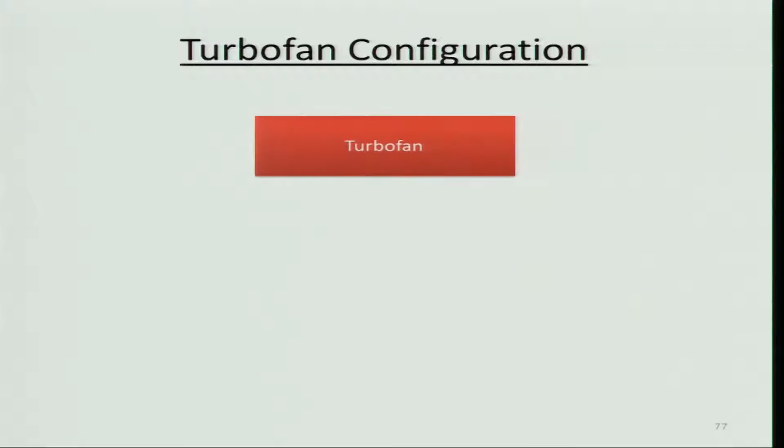So, various configurations have been developed over the years. I will show you some of them, and an important configuration is the single spool engine. Single spool means basically a single shaft connecting both the low pressure compressor and low pressure turbine.

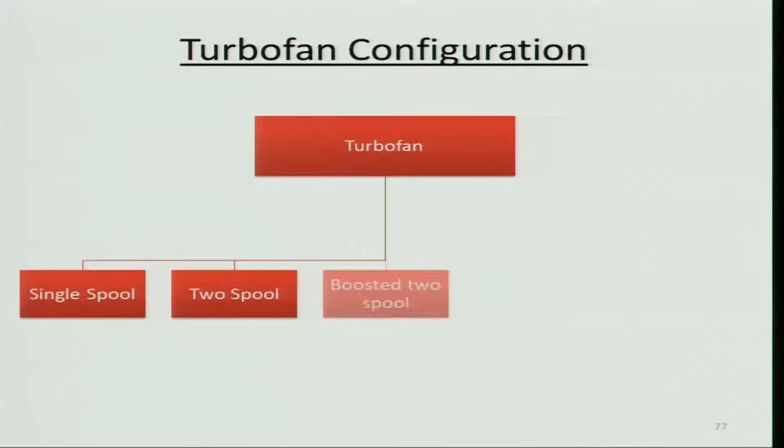There is the low pressure compressor, high pressure compressor, high pressure turbine, and low pressure turbine, and the two spool engine where you have two shafts which take care of surging, and boosted two spool engines and three spool engines. There is another variety which has come up, the geared fan, and another configuration that has come up not from the perspective of avoiding surging, but for compactness: mixed flow engines.

In separate flow or unmixed flow engines, the fan flow and core flow are separately expanded in two different nozzles, but there is a turbofan engine where you can mix them together and then expand in a single nozzle such that the noise level can be reduced. Of course you can get the thrust too, but I am not going to discuss that.

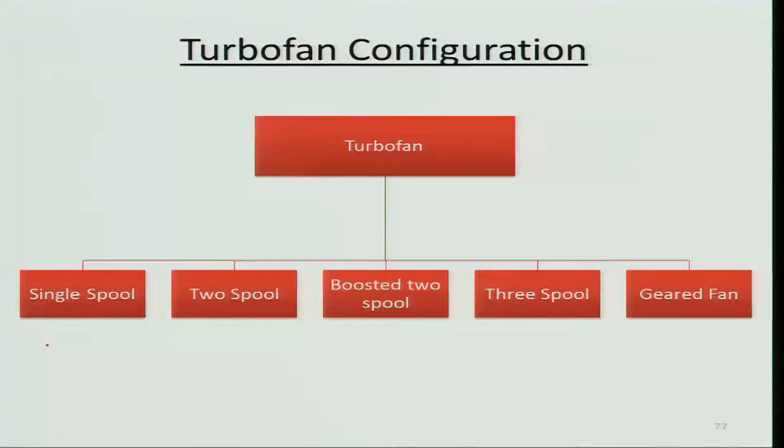What I am now concentrating on is discussing the engines. If you look at the single spool engines, it is basically a very simple one and is being used in fighter aircraft and other places, but some modern fighter aircraft also use two spool engines.

Let us discuss about two spool kind of engine. If you look at here, the high pressure turbine, this is basically a turbine, right. High pressure, HP stands for high pressure, it will be running the high pressure compressor, and the low pressure turbine will be connected to the fan.

Why? Because the fan cannot operate at a higher RPM, the tip particularly will be have a high speed and it may exceed the speed of sound. If it exceeds, then the shock will be formed, and these are not designed for that. Therefore, the losses will be very, very high.

These are all subsonic turbo machinery what is being used as of now. In future, maybe transonic or supersonic will be used. Maybe some of you will be involved in designing that, which is a very, very challenging job. So this kind of engine is being used, and particularly I have taken an example.

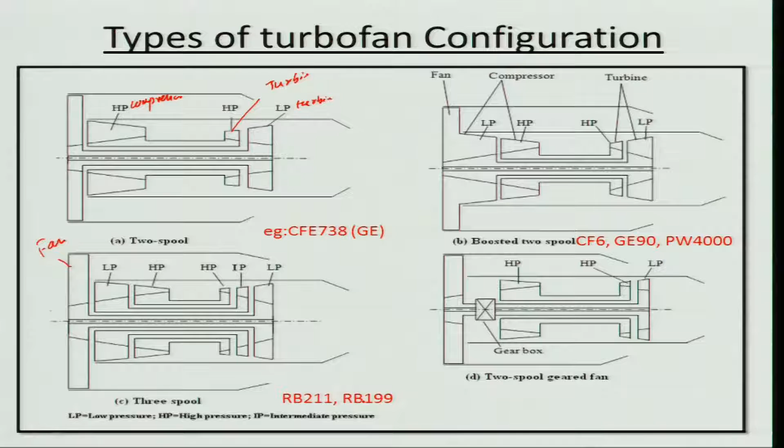There can be several engines, I have taken a few of them as examples, but there is another engine which is being promoted by Pratt and Whitney, 2 spool geared engines. Instead of using a direct connection between the low pressure turbine and the fan, they have used a gearbox, but keep in mind that the design of a gearbox is not that easy because the power level will be quite high.

We will see this kind of problem particularly in turboprop engines, but here the power from the low pressure turbine which will be transferred to the fan will be relatively low as compared to turboprop engines. So, therefore, they are designing this gearbox which is quite noisy, it makes a lot of mechanical noise. So you can control this speed and manage to have a higher efficiency fan over a whole range of operation. So, therefore, they are already using this advanced fan and advanced technology fan integrator engines, but it is not very popular as of now even today.

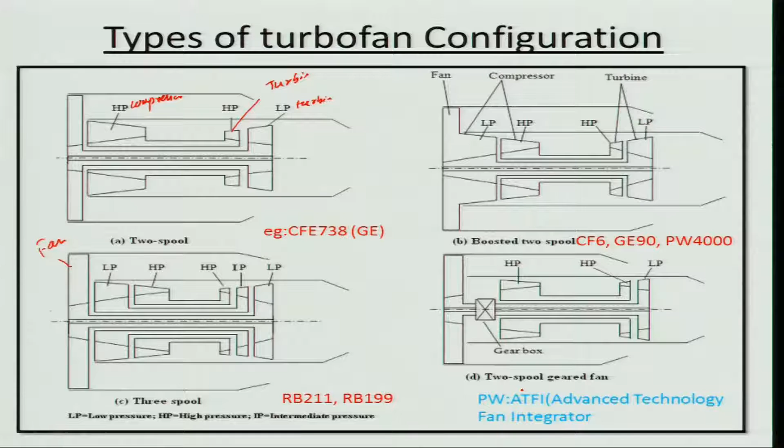Now we will take up an example of how to solve a problem like an ideal turbofan engine flying at an altitude of 10 kilometers, flight Mach number of 0.85. The pressure ratio across the compressor and fan is 10 and 2 respectively. The total compression ratio in the core stream will be 20, that is 10 into the fan pressure ratio of 2, keep that in mind. Bypass ratio of the turbofan is 5 in this example. You will have to determine the specific thrust, specific fuel consumption, propulsive efficiency, thermal efficiency, overall efficiency, and also determine the static thrust and TSFC under the static condition at sea level.

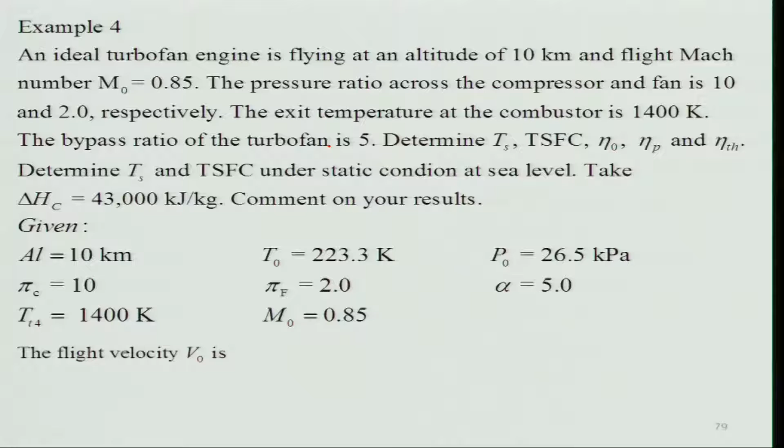So these data are given as I discussed. First we will have to find out what is the flight velocity. We can get that very easily because we know this altitude, from this altitude we will get the temperature, and then V naught is equal to root over gamma R T naught multiplied by the flight Mach number. When you substitute these values, you will get 254.6 meters per second.

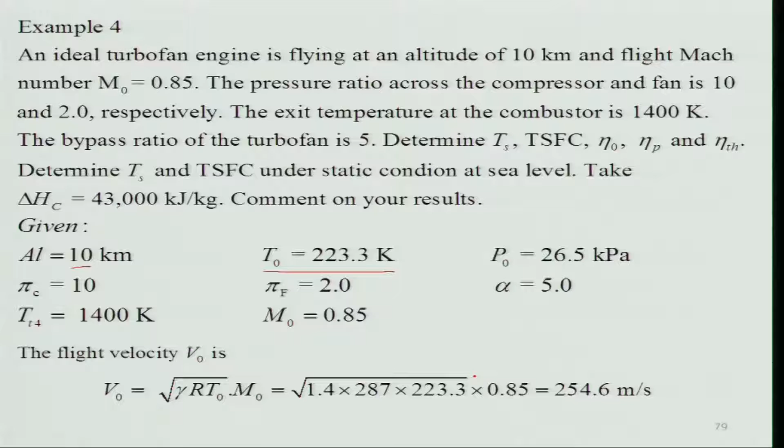As I am emphasizing, whenever you want to solve a problem, it is better to solve in a systematic way, not going straight into the formulas. But whenever you are going to do parametric studies, it is advisable to use those formulas so that you can write a program and do it very easily for repetitive jobs, you need not waste your time. But to appreciate how these things work, it is important to solve this problem step by step.

So what is happening, I have already talked about this in the TS diagram. This is basically compression: 0 to T2 is your fan, and T2 to T3 is your compressor, and T3 to T4 is basically combustion. This is the combustion, and expansion is 4 to 9. In this case, this is the turbine, low pressure turbine, high pressure turbine, and then the nozzle. This is the nozzle portion.

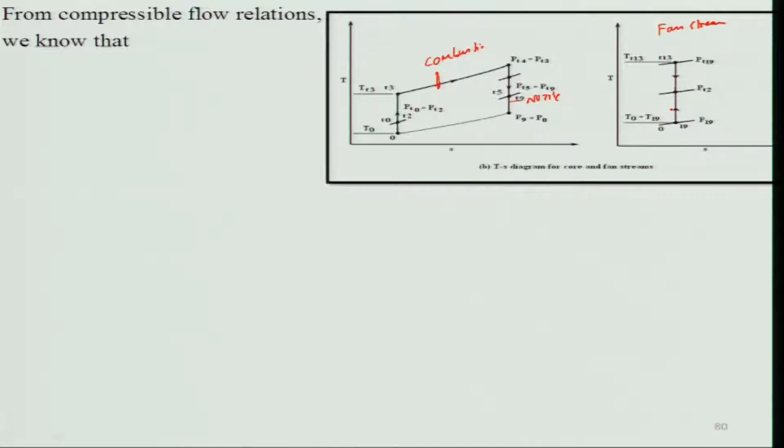And similarly, in the fan stream, this is your fan stream, going from P naught to PT2, and then PT2 to PT13. And of course it is again expanded because it is ideal, so it will come back to P19, which is the same as P naught. So from compressible flow relation or isentropic flow relation, we can get Tt naught divided by T naught.

This is equal to 1 plus gamma minus 1 divided by 2 times M naught square. We substitute these values and get the total temperature Tt naught as 255.6. Keep in mind this is not very different from T naught because the Mach number is quite small, and we know that Tt naught is equal to Tt1 is equal to Tt2, because it is an adiabatic process.

Again, from isentropic relations you can get the pressure ratio, because what we are doing is going point by point and getting these values. Sometimes you may avoid doing this in a systematic manner. I know that whenever you are in an exam, you will take a little shortcut route, but you may commit an error in the process. One has to be careful.

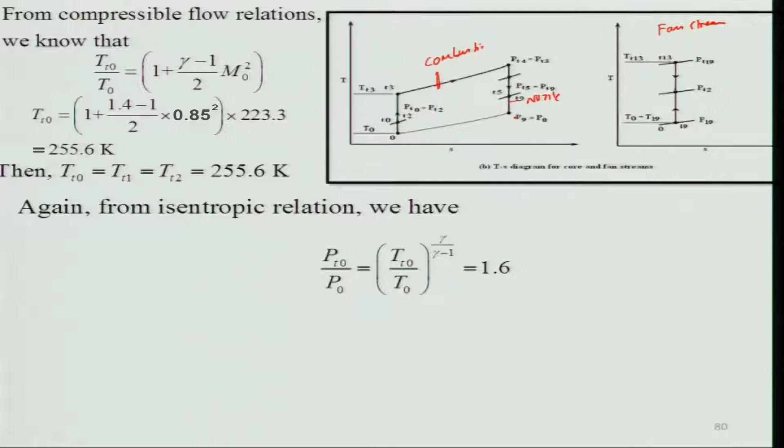The PT naught is equal to 42.5 kilopascals. So for the fan stream, we get TT2 is equal to 255.6 Kelvin, and PT2 is equal to the same as PT naught, 42.5 kilopascals. That means we are looking at the fan stream, and by the same way we can look at the compression, how much change in temperature is occurring in the compressor.

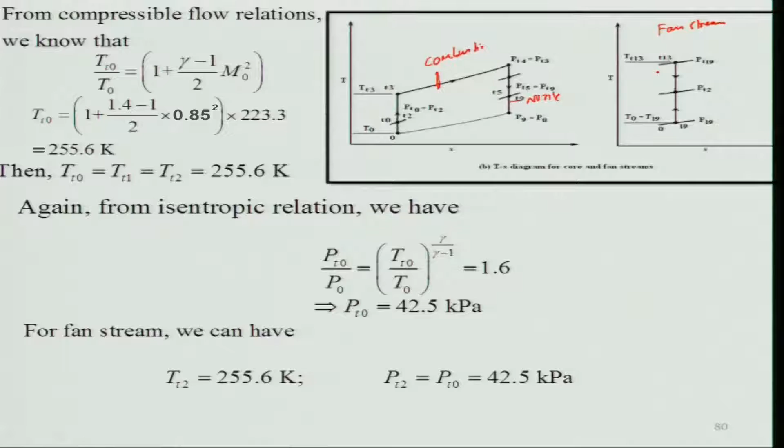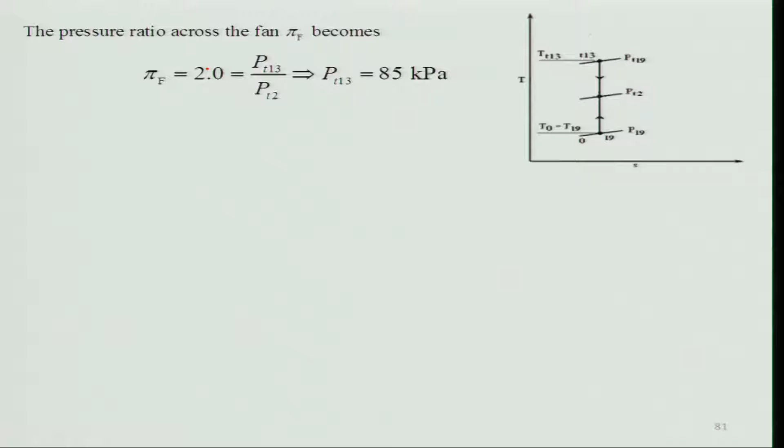So if you look at the pressure ratio across the fan, pi f becomes PT13 by PT2, which is given as 2. So you can get PT13 as 85 kilopascals, and we can estimate the temperature using the isentropic relationship, which is basically given in terms of pi f. So you just substitute these values and, knowing TT2, you can get 311.64 Kelvin.

So there is very little change in the temperature, and as we know that P13 is equal to P9 is equal to P19 is equal to P0 for an ideal cycle. For a real cycle it need not be so. So V19 square, we can get 2 Cp times Tt19 minus T19, we can take it out and express in terms of pressure ratio. So these we already know, P19 is nothing but P0, and Pt19 we know.

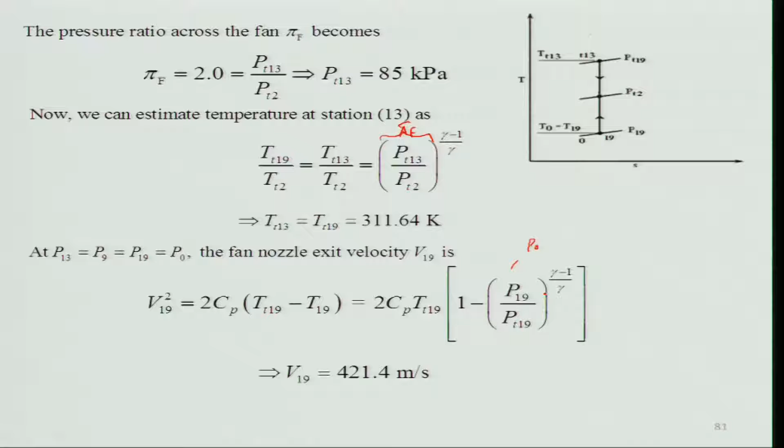So, we substitute these values, and when you do that you will get V19 is 421.4 meter per second. If you look at, there is an increase in the velocity due to the work addition to the flow by the fan. So, overall pressure ratio across both the compressor and fan, due to compression in the core engine, is pi c is 20 as I told.

So, you can get TT3 is equal to TT2 times pi c to the power gamma minus 1 divided by gamma, this for isentropic relationship, you can get this 602.1, and similarly you can get PT3, because you know the pressure ratio.

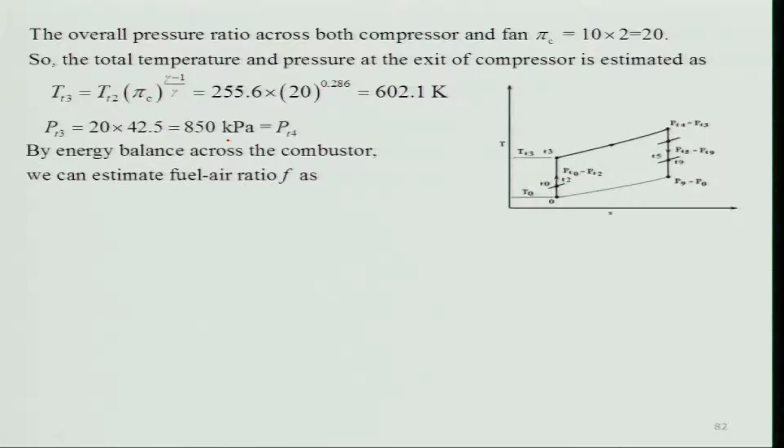So, you know the PT2, so you can get that very easily. By energy balance across the combustor, we can estimate fuel air ratio F, which we have done for the turbojet engine, similar to that, just substitute these values because it is given here 1400 Kelvin for TT4. So TT2 you know, you can get these values.

By carrying out power balance between the compressor, turbine and also the fan, we can estimate temperature. For example, we know that WC plus W fan is equal to W turbine.

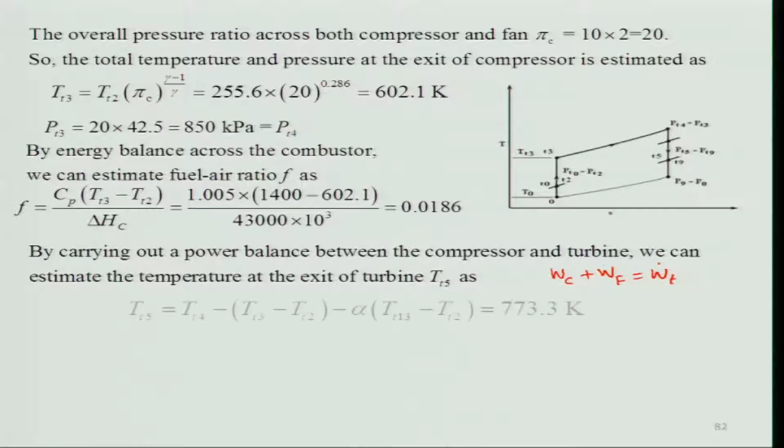If I take this and use the first law of thermodynamics for this, then I can get an expression, and we are using the same Cp, but keep in mind in a real cycle we will be using different Cp. In this case the Cp cancels out, you will get Tt5 is equal to Tt4 minus T3 minus T2 minus alpha times T13 minus T2. This alpha comes into picture because of mass being separated.

This is nothing but your bypass ratio. So, when you substitute, because alpha is known, T13 is known, Tt4 is known, T4 is known, that is your 1400. So you can get Tt5.

If you look at the turbine, it is expanded from 1400 to 773.3 Kelvin temperature. By using this isentropic relation, we can estimate total pressure at the exit of the turbine. The PT5 is equal to PT4.

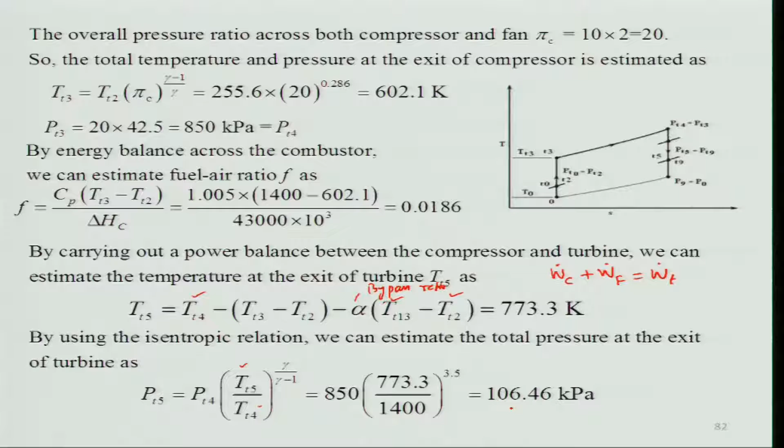We know this Tt5, we know Tt4, substitute these values, you will get the pressure at this point, 106.46 kilopascal. So, this is a very systematic way it is done, there is nothing really to understand because it is quite easy.

To estimate the nozzle exit velocity, we will have to assume Tt9 is equal to Tt5. It is not that we are assuming, it is because it is an adiabatic process, and under an ideal condition there are no losses. So, Pt9 is equal to Pt5.

So, when you substitute this value, V9 is equal to root over 2 Cp times Tt9 minus T9, and we know this pressure ratio which can be expressed as 2 Cp times 1 minus P9 over Pt5 to the power gamma minus 1 divided by gamma, and when you substitute these values you will get V9 is 714 meter per second.

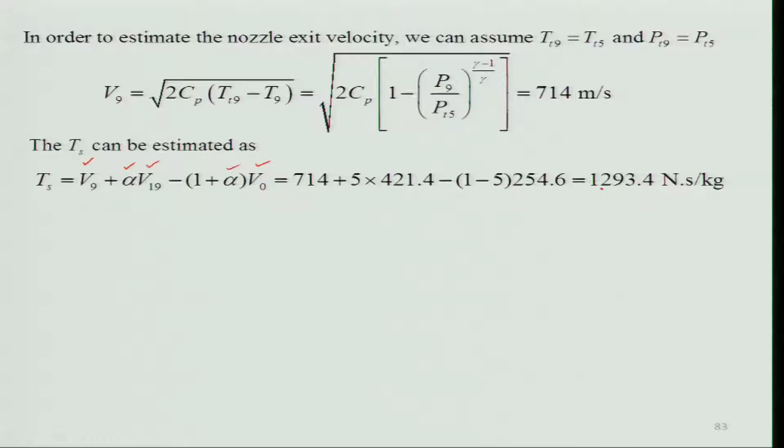And Ts we can estimate very easily, because we know V9 and alpha is known, V19 already we have found out, and this V0 is known, this is known. So, you substitute and you will get the specific thrust, which is basically 1293.4 Newton second per kg.

So, TSFC can be estimated because we have already estimated F, divided by specific thrust. So, you will get 1.44 times 10 to the power minus 4 kg per Newton second.

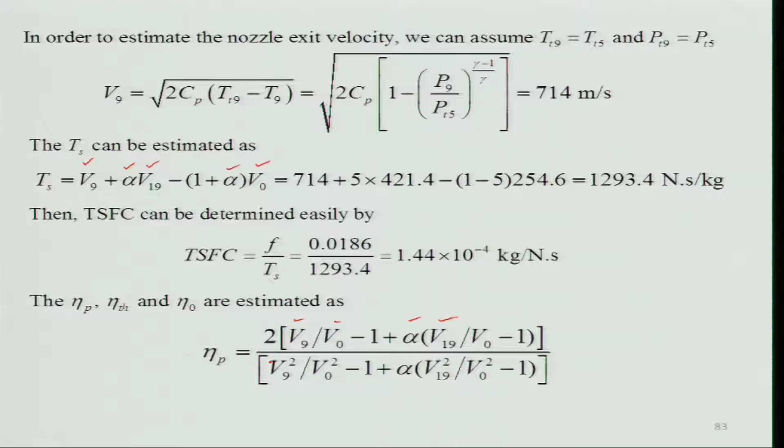So, we will estimate this propulsive efficiency, thermal efficiency and overall efficiency. If you look at this, we have already derived it, we will just use that, or you can use your own thing, that is the thrust power, total thrust into the velocity, this portion divided by the other, you can use that. So, V9 is known, V0 is known, alpha is known, V19 is known. So you can estimate this and substitute those values and get that.

What I would suggest is although I have used here the derived relationship for propulsive and thermal efficiency, you need not do that, you can go to the basic definition and then do it, so that you need not memorize it.

So, you will get that propulsive efficiency is 65.32 percent, and similarly when you substitute these values of velocities like V0, V9 and V19, and alpha is the bypass ratio and the heat of combustion, you will get thermal efficiency 63.06 percentage, and the overall efficiency when you multiply both you will get it is 41.19.

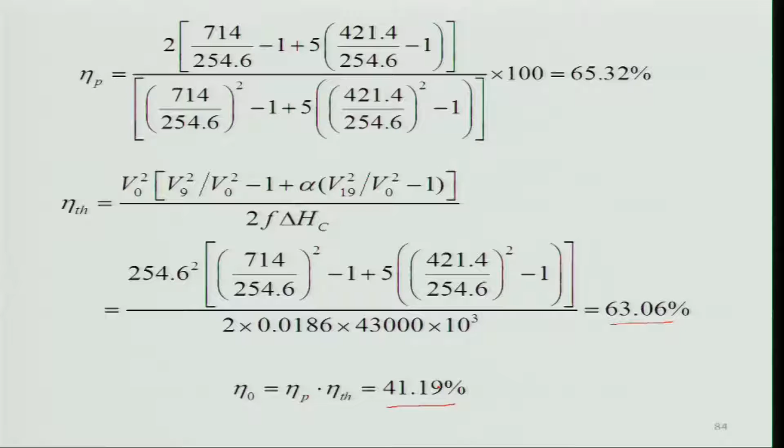If you look at the overall efficiency, comparing the same conditions, you will find that the turbofan engine has higher overall efficiency than the turbojet engine. You must appreciate that point, and I will be giving some problems in the assignment where you could get a chance to feel for it by solving yourself.

Now we will move into the turboprop engine, which is basically used whenever we want to have a higher thrust level, and of course whenever we need to have a better TSFC as well.

The typical turboprop engine schematic shows it has a propeller instead of a fan, which is unducted - there is no duct. Keep in mind the length of the blade in a propeller is much longer compared to the blade length in a turbofan engine. So there are two differences: it's an unducted fan, and also the blade length is higher.

Therefore, it has to be operated at a very low RPM. Why? Because if the length is higher, then at the tip the local velocity of the fluid will be much higher - omega into R. So since these are very high values, it has to be rotated at a lower RPM, and therefore a gearbox is used to reduce this RPM.

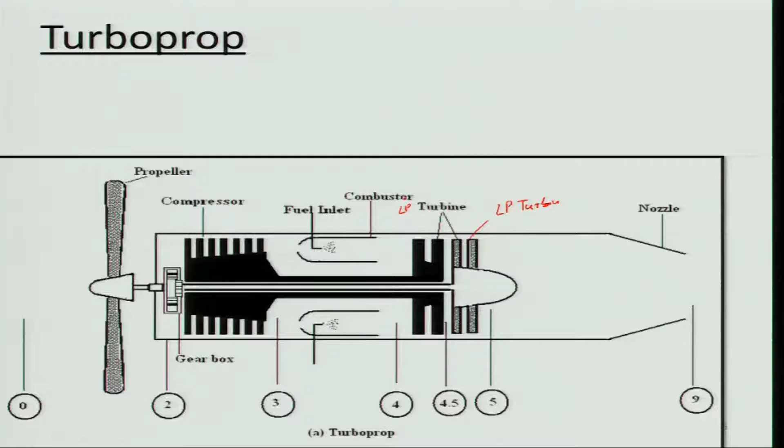If you look at the shaft, it is clearly a 2-spool kind of engine, where the low pressure turbine is connected through a gearbox to the propeller. The high pressure turbine is connected to the compressor, and this is the combustion chamber. The station numbers we are using are similar to before.

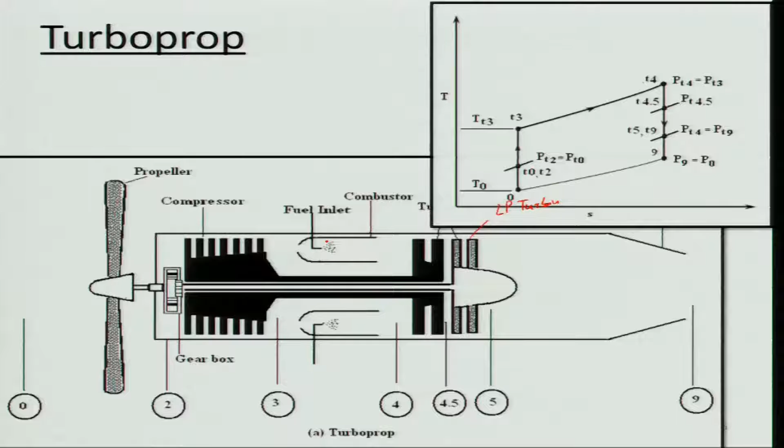Now let us look at the process. 0 to 2 is your compression due to the propeller. Keep in mind this is your core engine - air is also flowing through the core engine - and this is the propeller where air comes over and goes out.

There is compression in the compressor, and there is constant pressure heat addition - combustion - followed by expansion in the high pressure turbine from 4 to 4.5, then expansion in the low pressure turbine from 4.5 to 5, followed by the nozzle. The low pressure turbine and high pressure turbine - LPT and HPT - I am referring to.

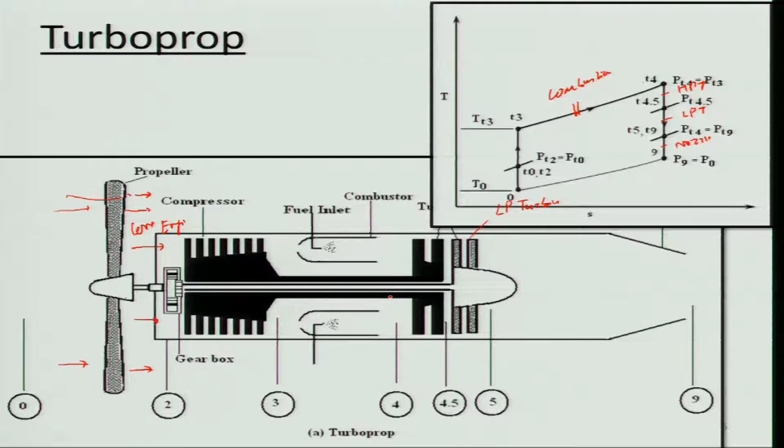So we need to carry out this analysis. Keep in mind we do not know how much air is passing through the propeller, because it is unducted. So how do we handle this? That is one very important concept. Another point is that the power given to the propeller is not fully converted into kinetic energy, because there will always be slip. Therefore, we use an efficiency known as propeller efficiency in this analysis, and we assume the gearbox efficiency is 1, which is not actually the case - that's the ideal assumption.

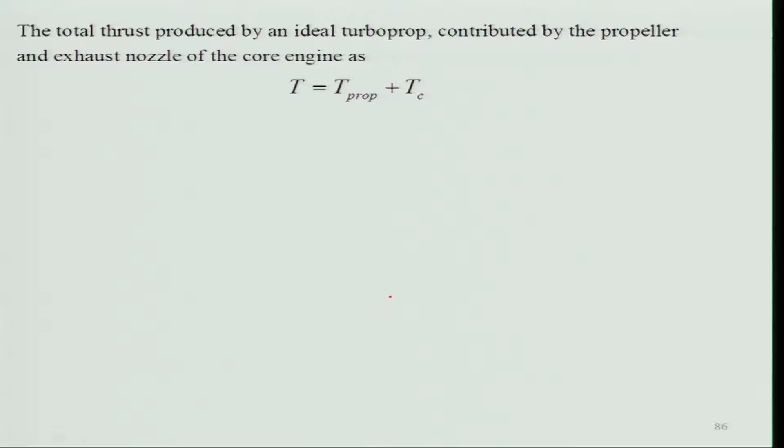So the total thrust produced by an ideal turboprop engine is contributed by two things: one is the core engine, and another is the propeller. If you look at which gives the major portion in a turboprop engine - does the propeller give more, or does the core engine give more? Generally, the propeller gives more thrust compared to the core engine, because the expansion in the nozzle is very small, although this is not clearly reflected in a TS diagram. Please keep that in mind.

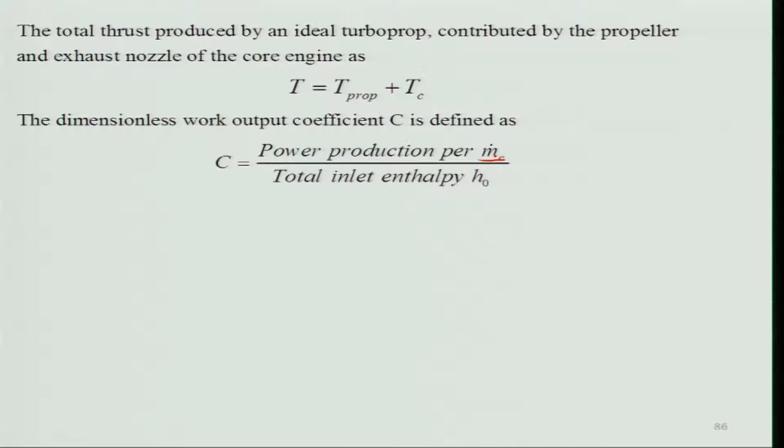We use this work output coefficient, and now we will be operating both thrust and the work output coefficient, trying to connect both. In all other analysis we use thrust and are not bothered about the work output, because we are interested in thrust and there is no problem handling that. So there is a little difference in analysis here, please keep that in mind.

Similarly, the work coefficient for the propeller will be eta propeller, the propeller efficiency, times the work input to the propeller, divided by m dot C Cp T naught. Keep in mind that we are not using total mass, we are using m dot C all the time, which has implications when we interpret the data, so I am emphasizing this point.

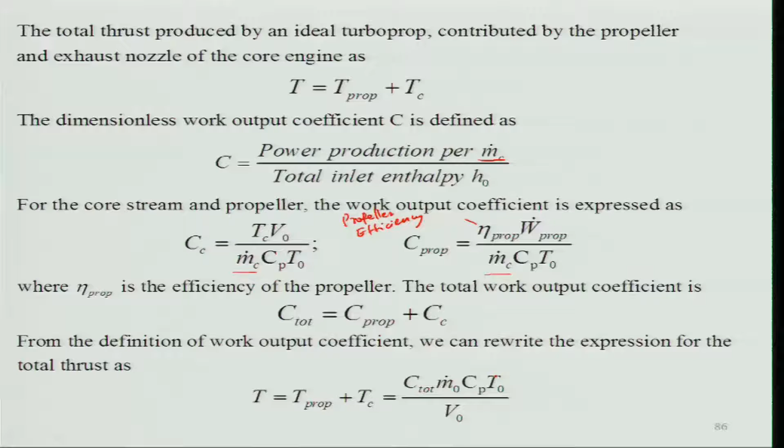The expression for the thrust developed by the core engine per flow rate can be expressed using the same analysis as for the turbojet engine. So Tc by m dot C equals A naught V9 by A naught minus M naught, and in place of that you can substitute the bigger expression already derived for turbojet engines, keeping in mind parameters like tau lambda, tau c, tau r and tau t, which are temperature ratios across components like turbine, compressor, air intake, and lambda, which is a slightly different thing defined earlier.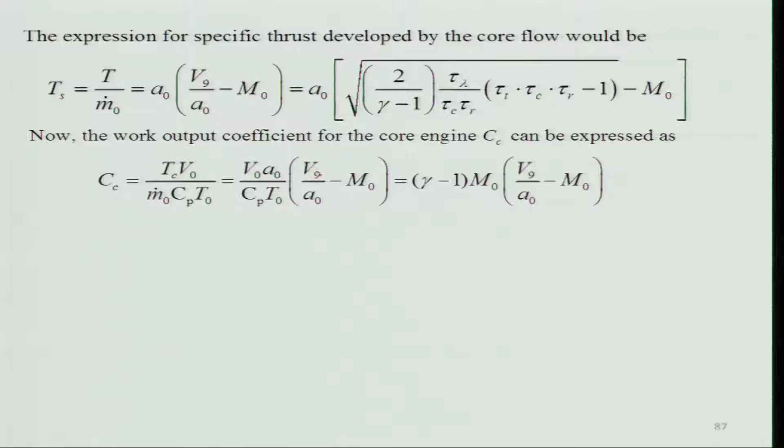The work output coefficient for the core engine is Tc by V naught divided by m naught Cp T naught, which we can express in terms of V9 and A naught by substituting these values. If you do the analysis, you will find it reduces to gamma minus 1 times m naught in the bracket V9 by A naught minus m naught. Here we are expressing Cp in terms of gamma.

The specific power, an important parameter for the turboprop engine, can be derived as Sp, the specific power, equals W dot total divided by m naught h naught, which is nothing but C total Cp T naught, where C total equals C propeller plus Cc. If you go to the definition of C total, you will get that this is nothing but C total Cp T naught.

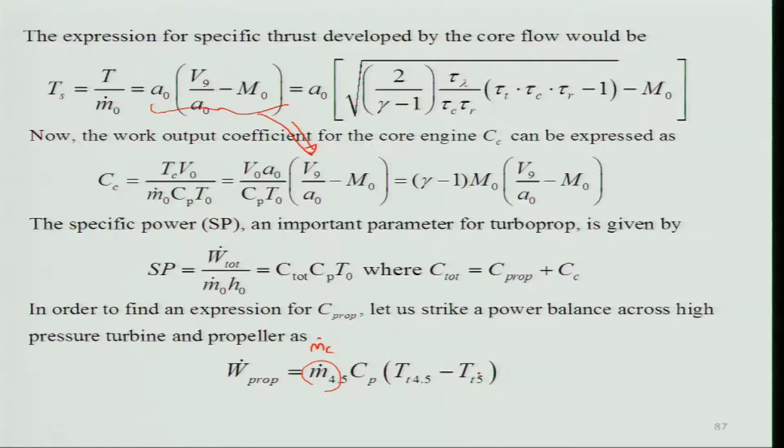In order to find an expression for C propeller, let us strike a power balance across the high pressure turbine and propeller. The propeller work input equals m dot 4.5, which is your m dot C, the air going through the core, times Cp and Tt 4.5 minus Tt 5.

So, by definition we know that C propeller will be basically W dot propeller into m dot Cp into T naught, and W dot propeller we have already seen that it is nothing but in terms of propeller efficiency and temperature, and if you just rewrite you will get T lambda tau T H. This is basically tau T for the high pressure turbine and tau T L is for the low pressure turbine. Similar to other engines, the expression for fuel air ratio you can get similar expressions which we have already derived for the turbofan and turbojet engines. So, TSFC you can get in the similar way, m dot F divided by T is equal to F divided by T by m dot C.

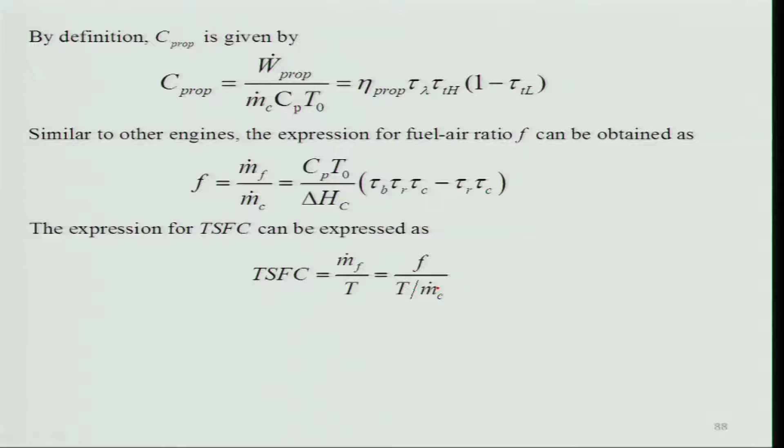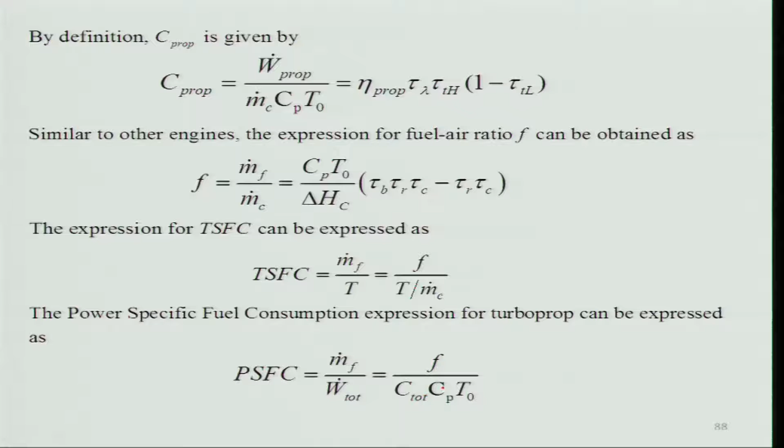Keep in mind what we are doing, we are basically looking at the mass flow rate through the core engine. The power specific fuel consumption expression, because it is a turboprop engine, therefore we are interested in the PSFC or power specific fuel consumption. So that is m dot F divided by W dot total. You know this F and C total, Cp and T naught. So if you substitute these values, you will get that.

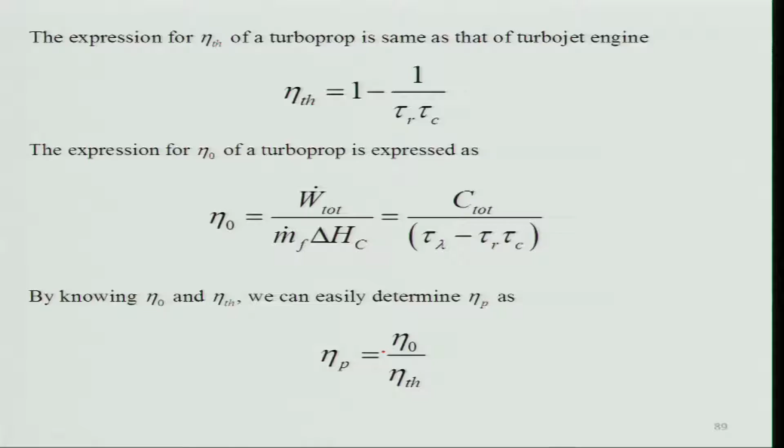And the expression for thermal efficiency will be similar to that of the turbojet engine, and for overall efficiency it is more important that you first really find out the overall efficiency in case of turboprop engine. But in case of turbojet and turbofan engine, you find out first the propulsive efficiency before you really find out overall efficiency. But it is the other way around here, because we need to find out this first and then you will get it, because we do not know really how much it is going. So this is the expression, similar way, same coefficient, but this is by definition m W dot total divided by m dot F delta H C. How much work being put into the engine, how much work being produced by the engine, and then how much fuel being burned. So by knowing this overall efficiency and thermal efficiency, we can get the propulsive efficiency. Keep in mind, this is not propeller efficiency, this is propulsive efficiency which is due to the motion of the vehicle or the engine. So that you should keep in mind.

So now what we will do, we will carry out a parametric analysis as we had done earlier, and then we will see what we are getting. Here what we are doing, we are basically taking 3 tau t values: tau t equal to 0.6, 0.7 and 0.8, and we are varying the pi c from 0 to 40, and then we are plotting specific thrust versus pi c for a certain altitude and certain flight Mach number.

You will find that when tau is 0.6, what is the meaning of that, and when tau increases to 0.8, what is the meaning of that? Tau, that means temperature ratio across the turbine, tau T, isn't it? This is tau T, that is your temperature ratio across the turbine. Lower means it is what? Less work, it is more work extraction, because the temperature at the exit of the turbine divided by the inlet.

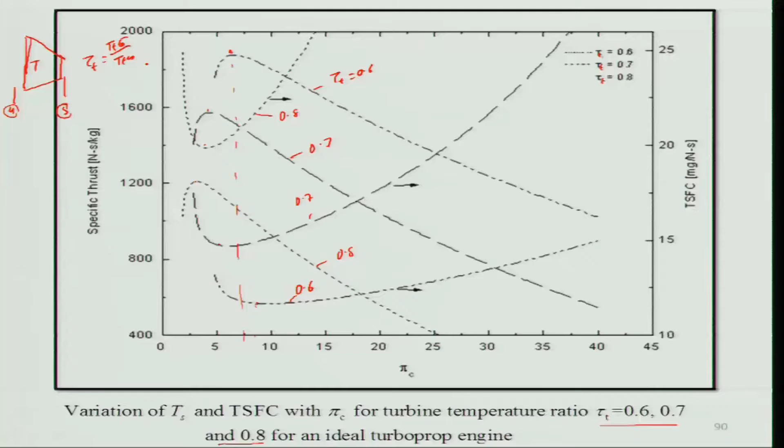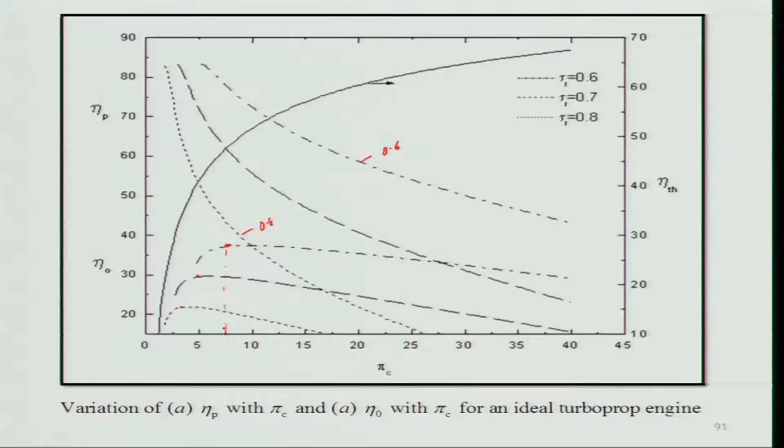at a higher pressure ratio across the compressor. That means my compressor will be more bulky, because the number of stages will be higher. So then you need to look at these aspects while designing a turboprop engine.

Of course, several other analyses one can carry out, but I will not consider those things. Let us look at an example.

A turboprop engine is flying at an altitude of 7 kilometers, that is T naught 242 Kelvin and P naught 41, and flight Mach number of 0.5, in the gas generator 50 kg of air is compressed with the pressure ratio of 12.

The exit temperature at the combustor is 1400 Kelvin, temperature ratio across the turbine is 0.5 we are using, and determine the thrust developed by core engine and propeller and TSFC if the propeller efficiency is 0.9.

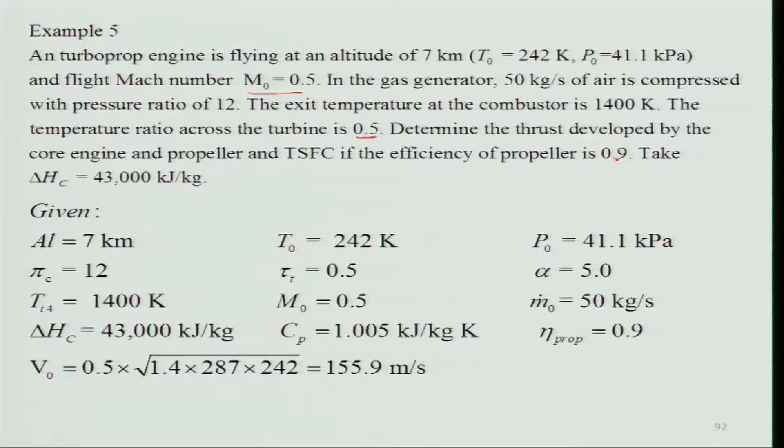And as usual we can find out the flight velocity, because Mach number is given, and we know this temperature T naught, and we know the specific gas constant, we substitute...

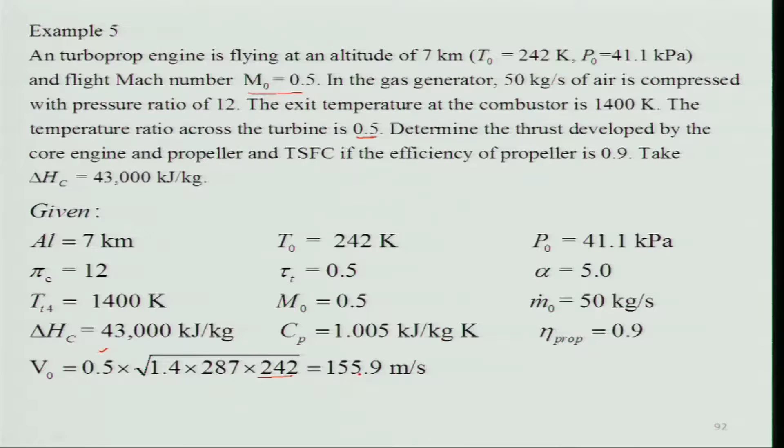which happens to be very very low, 155.9 meters per second.

And propeller thrust can be expressed as C propeller m dot Cp T naught by V naught, and we can find it is given the propeller efficiency, W dot P propeller we need to calculate, and V naught already we have calculated.

So, and we know that m W dot propeller is nothing but m dot Cp Tt4.5 minus Tt5.

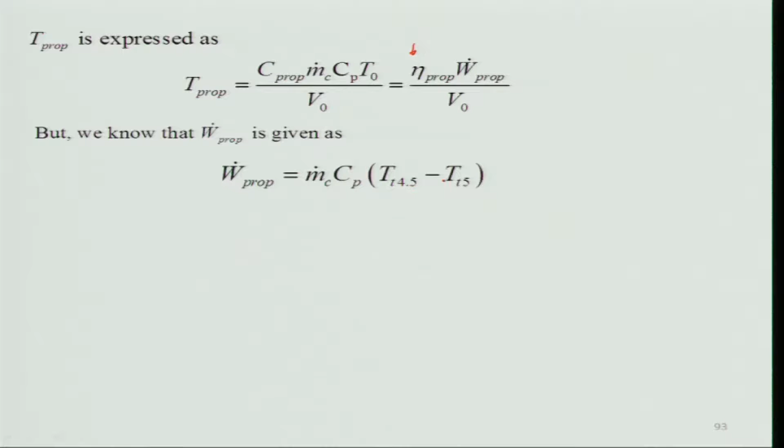And when we carry out this Cp and then energy balance across the low pressure turbine and propeller, so we will get...

we carry out energy balance across the low pressure turbine and the compression, this is not low pressure, this is basically high pressure turbine across the compressor, because this is your compressor...

this is your basically high pressure turbine, right, isn't it.

So, I know this Tt4 is given and I need to find out this Tt3, and pressure ratio is given. So I can find out, similarly Tt2 has to be found out, and of course, this Cp will cancel out.

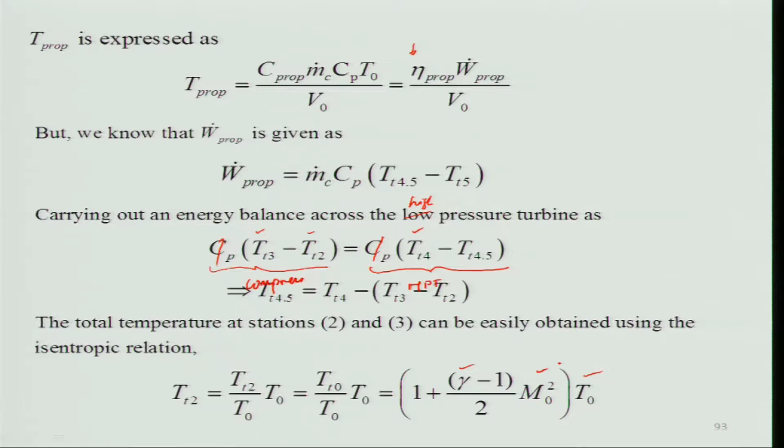So, I can get Tt4.5 is equal to Tt4 minus Tt3 minus Tt2. So we need to determine Tt3 and Tt2. Tt2 is basically Tt2 divided by T naught into T naught, and this we already know. We know these values, we know gamma, so we can determine Tt2, similar to what we had done before.

The values of Tt3 can be easily estimated because we know the pressure ratio across the compressor, which is 12, and gamma, which is 1.4. So we can get these values. By knowing Tt3, Tt2, and Tt4, we can get Tt4.5.

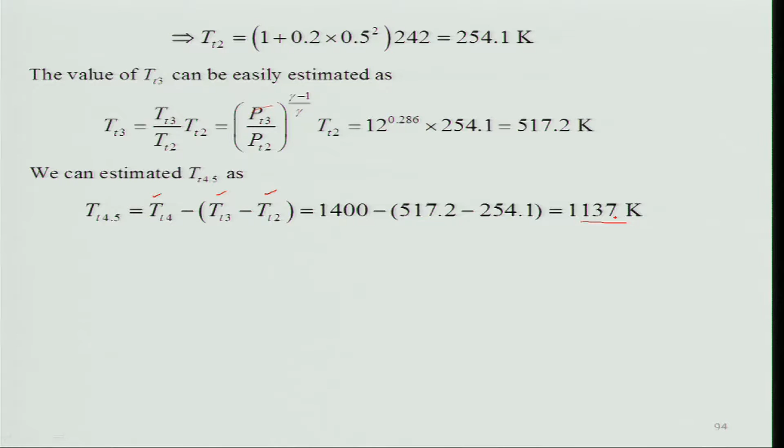The propeller thrust we can get as T equals eta propeller into m dot c. m dot c is given, the mass flow of air, 50 kg per second, which is an important parameter, and Cp is known, along with Tt4.5 minus Tt5, and V naught you can get as well.

To get Tt5, tau t is given as 0.5, which is nothing but Tt5 divided by Tt4. So from that, since Tt4 is 1400, into 0.5, Tt5 is equal to 700. That is given, so you can find it very easily.

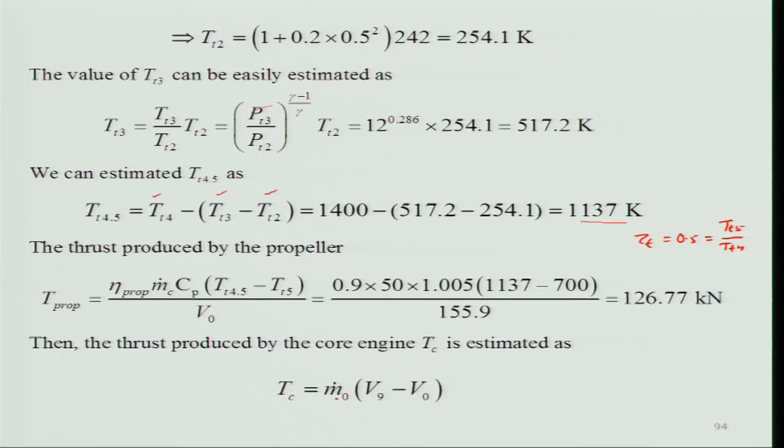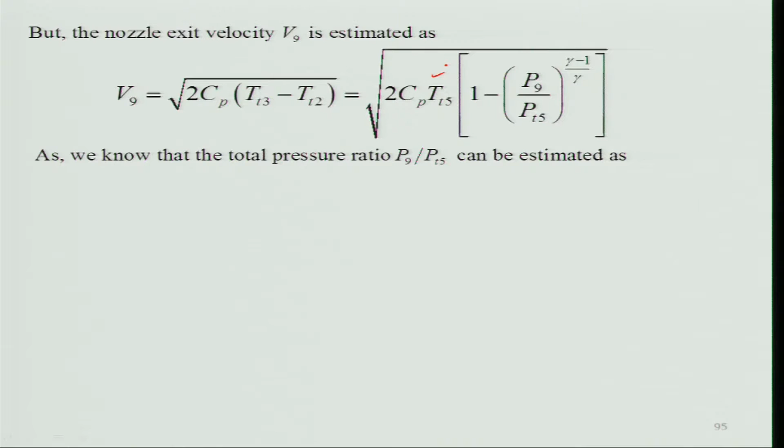The thrust produced by the core engine will be Tc equals m naught times V9 minus V naught. The nozzle exit velocity you can get by this expression, knowing Tt5 and Cp, since the nozzle is fully expanded. We need the total pressure ratio across the nozzle, Pt5 by P9, and substituting, this happens to be 0.8.

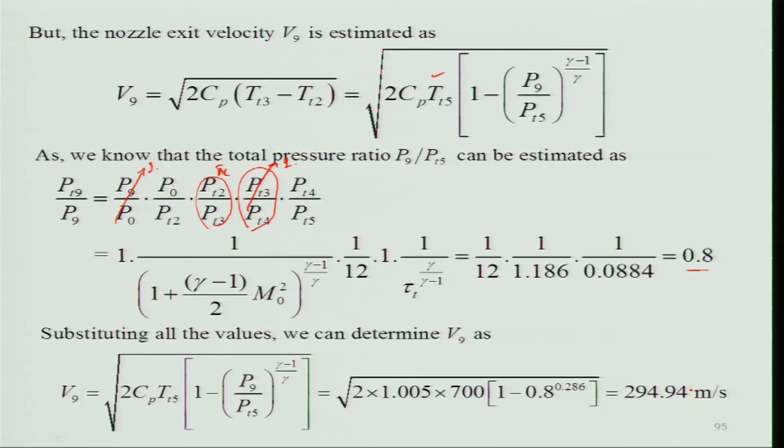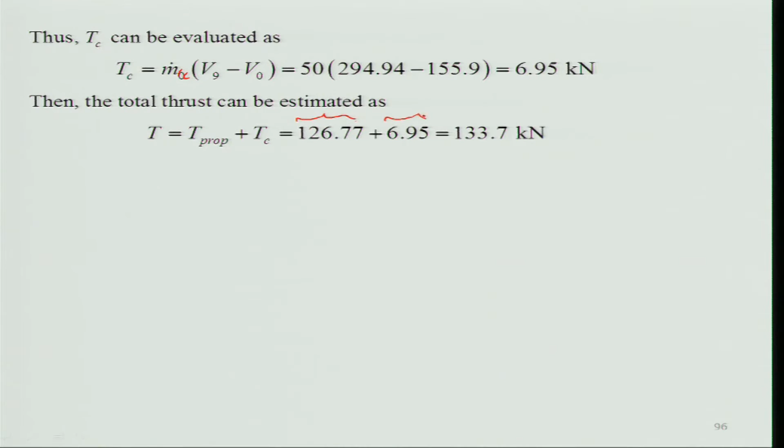Substituting all values, we get V9 is 294.94 meters per second. After knowing this, we can get Tc, using Mc and V9 minus V0. By knowing Tc, we can get the total thrust, since total thrust equals propeller thrust plus core engine thrust. You can see that the propeller thrust is much higher compared to the core thrust, which is quite small.

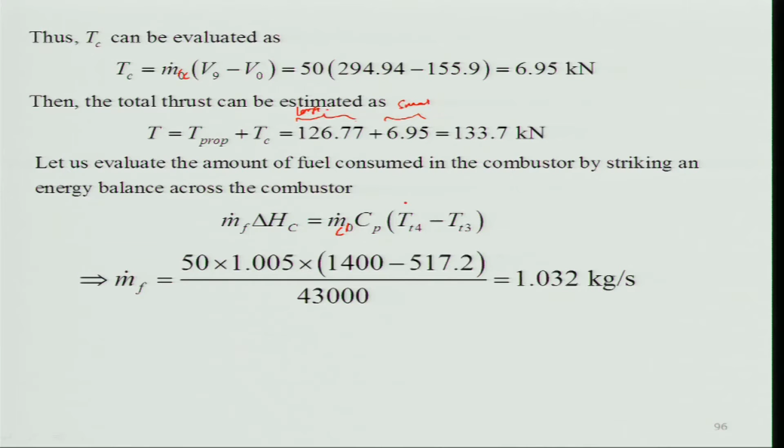Let us evaluate the amount of fuel consumption by striking this balance. This will be m dot c basically, and if you substitute these values, since this is known, this is known, and this is given, you can substitute and get those values. So TSFC you can get as m dot f divided by T, and you can get those values.

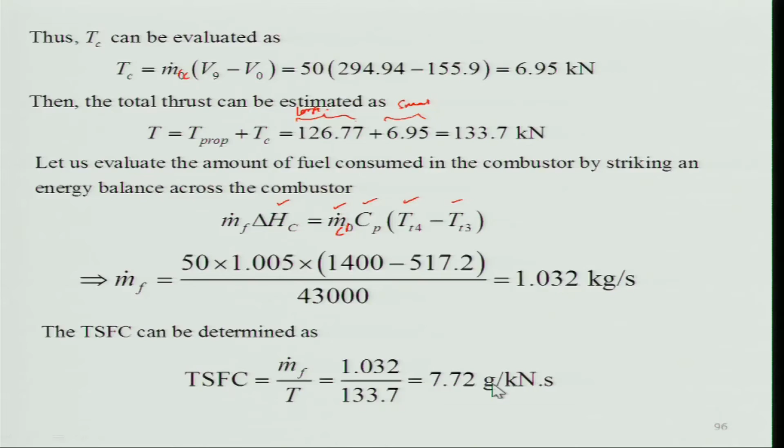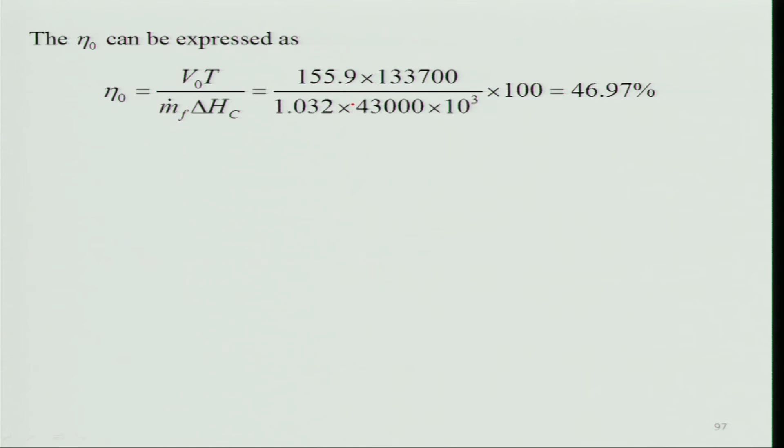Then we need to find the overall efficiency, because the total thrust into V naught divided by m dot f into delta HC gives you this. Substituting these values, you get 46.97, and you can find the thermal efficiency very easily. Note that the propeller thrust is quite high compared to this, and TSFC is quite small compared to other engines.

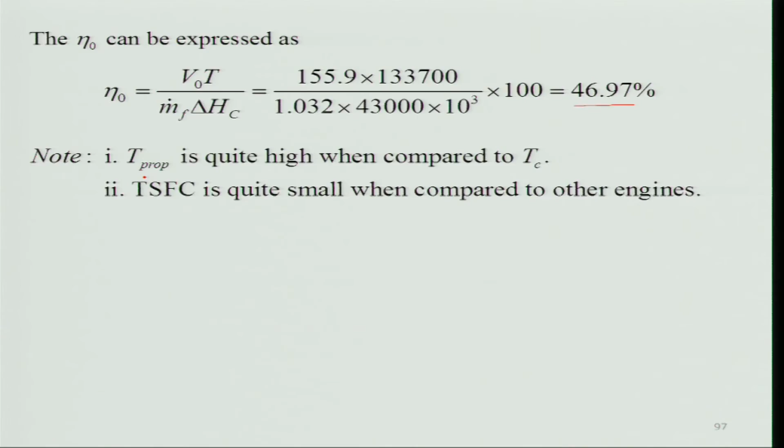So, with this we will stop here, and in the next lecture we will be looking at real cycle analysis.